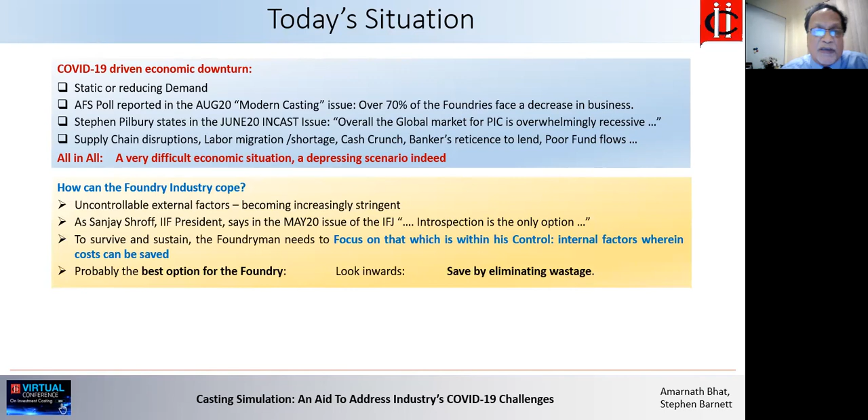The external factors are becoming more and more stringent. So we need to look at what is within our control, look within, and that probably is the best option for the foundry, save by eliminating wastage.

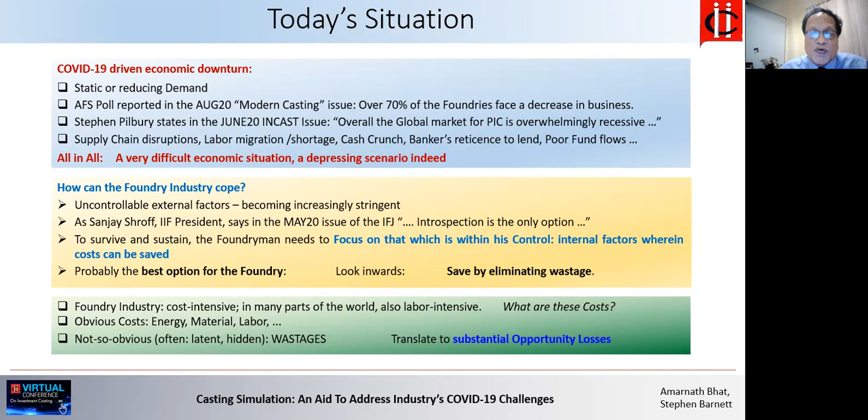The foundry industry worldwide is cost intensive. Out here, it's also labor intensive. What are these costs? Some of the obvious costs are energy, material, labor, and so forth. But some of the not so obvious, often quite latent or hidden costs are wastages. And these lead to substantial opportunity losses.

What can the foundry do? What are these factors that are within the foundryman's control? First, minimization of specific consumption of energy, material, and so forth.

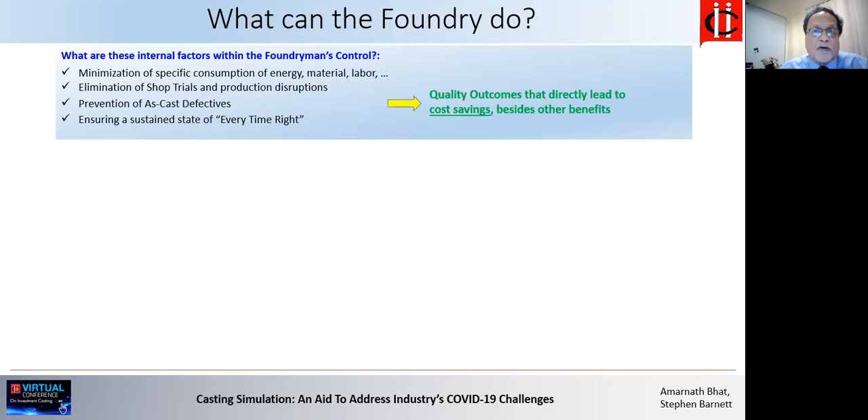Eliminate, maybe to start with reduce, but eliminate shop trials and disruptions. Prevent as-cast defectives and ensure a sustained state of not only first time right, but every time right. All this will lead to quality outcomes that directly lead to benefits such as cost savings.

Now, the key thing in all this is prevention of wastage. Whether we do more trials, whether we have as-cast defectives, or our yield is poor, it all boils down to wastage. So if we prevent wastage, it translates to opportunity gains. As Philip Crosby wrote in his book Quality is Free in 1980, quality improvement is through defect prevention. And as all of us know, prevention is always better than cure.

Now, where does casting simulation come into all this? If you look at the goals on the shop floor, quality improvement, yield improvement, and more critically, defect prevention and elimination of trials, all these are not very well served by manual means alone. Manual methods do not hold a promise of significant mitigation of the problem over the long term. What is needed is computer-aided solutions.

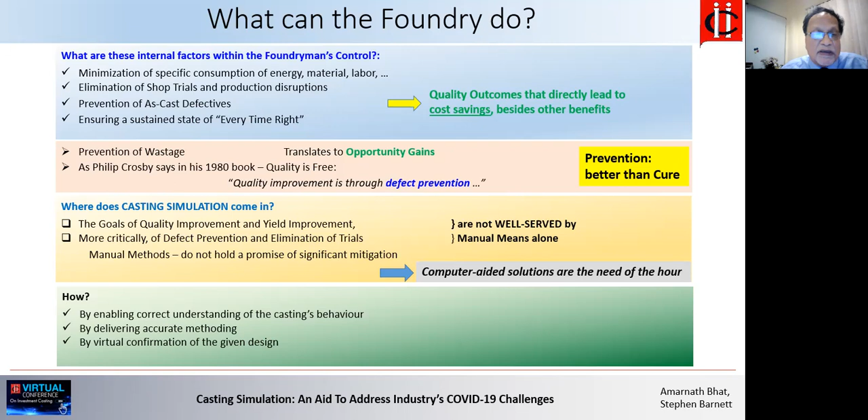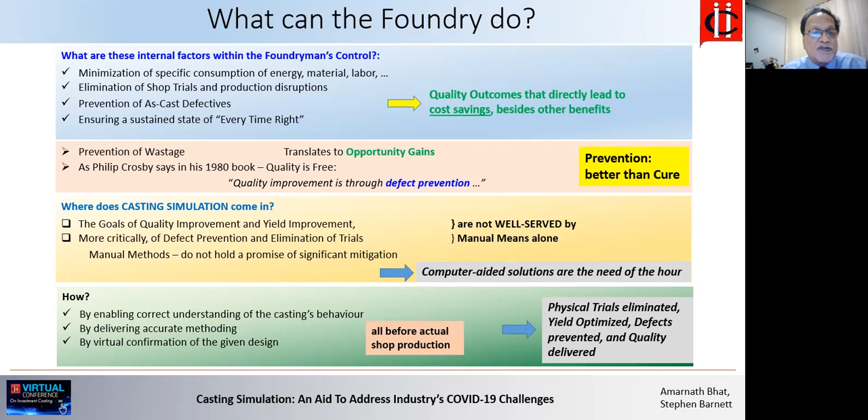Now, how is this possible? By eliminating defects, by enabling correct understanding of the casting's behavior, by delivering accurate methoding, and by virtual confirmation of the given design, all of this before we actually produce on the shop floor. This would result in physical trials being eliminated, yield being optimized, defects being prevented, and quality being delivered.

Of the various functional areas in a foundry, broadly we can classify into three: design, production, and finishing operations. The most critical, the most vital one is methoding. This is directly linked to product quality, yield, and shop trials. Most importantly, it is the single biggest factor that is almost completely within the foundryman's control.

Now, for a method to be effective, what we mean by this is it should consistently deliver defect-free castings. That means it should be robust enough and accurate enough to consistently deliver defect-free castings. It should be accurate in all design aspects, with regard to all the principles and so forth, but it should factor in the foundry's constraints and capabilities.

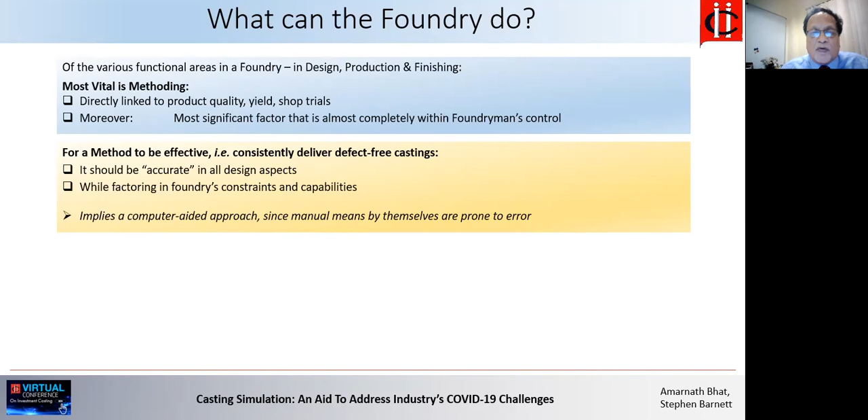Now, all this means that you need a computer-aided approach because manual means by themselves are prone to error. So we therefore focus on design and improvement of methods using computer-aided tools such as simulation systems. What can they do? They can prevent defects, assure quality, improve yield, eliminate shop trials, which are a complete waste, and make the method robust.

Now, all these outcomes contribute to reduction in overall operating costs, and this is a very important goal to achieve in the current difficult times that we are going through.

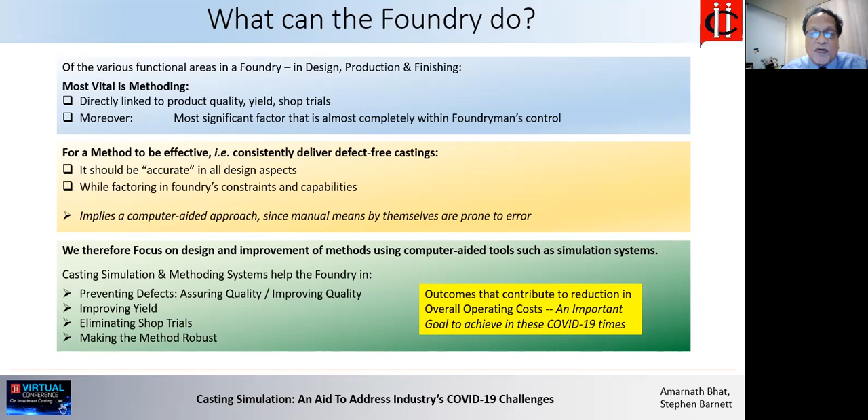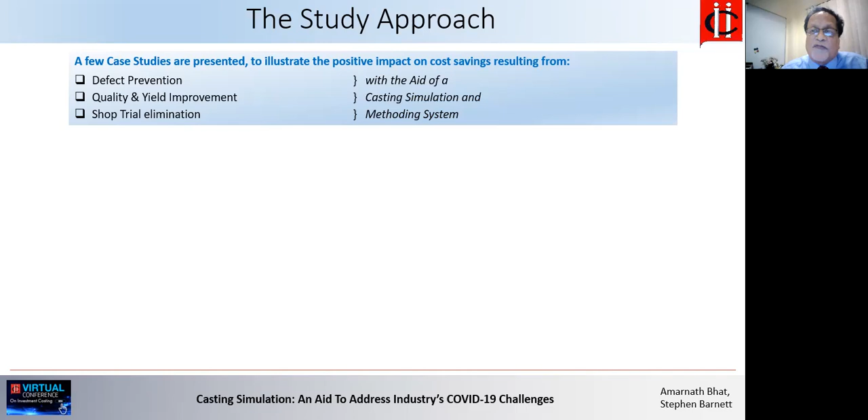Now, what is the approach that we have used in this study? A few case studies have been taken up and we are presenting them to illustrate the positive impact on cost savings resulting from defect prevention, quality and yield improvement, and elimination of shop trials, all with the help of a casting simulation and methoding system.

The investment casting projects studied were 3 each at 3 foundries in India, all in Rajkot, and 1 project at a Hungarian foundry.

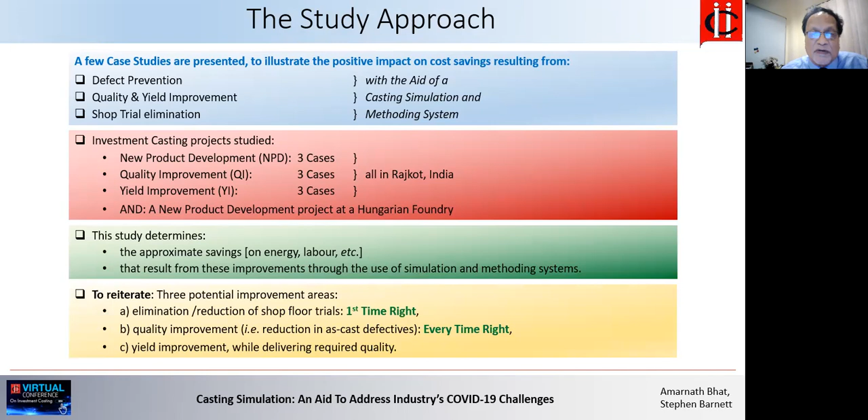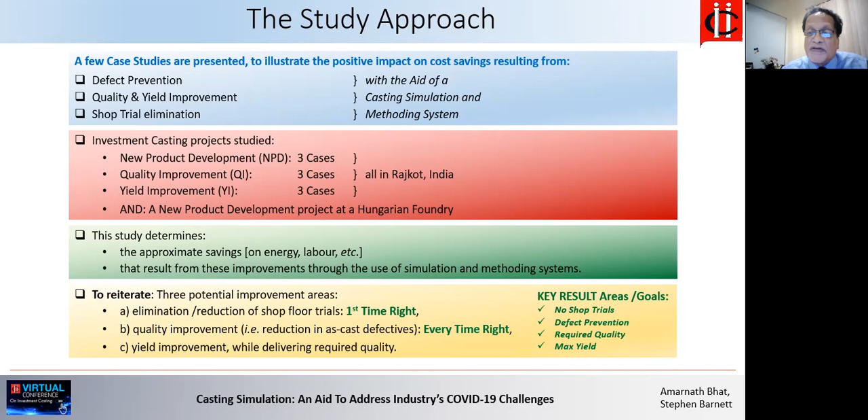This study determines approximate savings, since we have to depend on the foundry's inputs which are to some extent approximate. These are the savings achieved on various factors resulting from improvements using simulation systems. Three important improvement areas were identified: elimination or reduction of shop trials, quality improvement, and yield improvement, all while delivering the required quality. Those are our key result areas and goals.

The investment casting units used in this study include 4 units. Unit A is the Hungarian foundry Magyarmet. Units B, C, and D are 3 investment casting units in Rajkot, India. The Hungarian foundry's casting used a Hastelloy for this end section, while the foundries in Rajkot mostly used WCB castings, barring a few stainless steel castings. The Hungarian casting was by far the largest and most spread out, whereas the others are small to medium-sized castings.

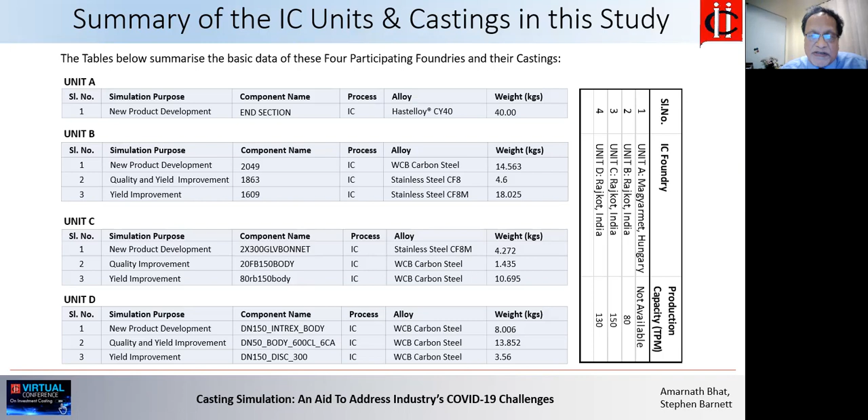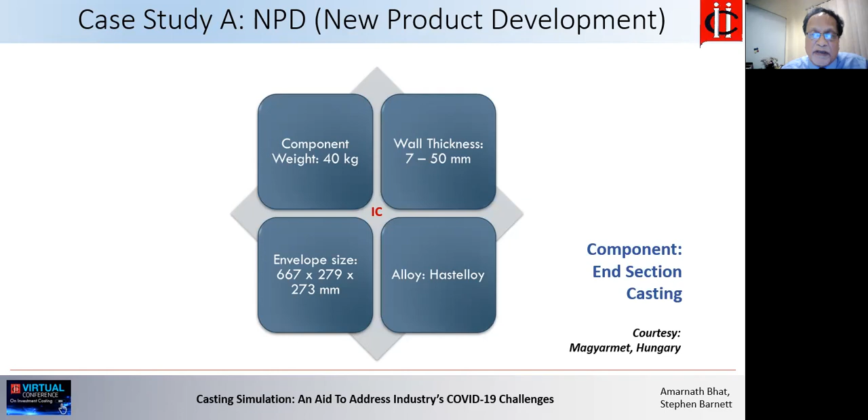Let's look at each case study in detail. The first is this Hastelloy component from Magyarmet, called end section casting, a 40 kg Hastelloy casting. You can see the pictures of that component. In stage 1, the foundry's customer didn't have a CAD model or drawings, but gave a sample component. A solid model was generated through physical measurements, and a step file was created once the model was obtained. This was used for casting simulation to determine castability, identify major hotspots, and understand freezing patterns where defects might occur.

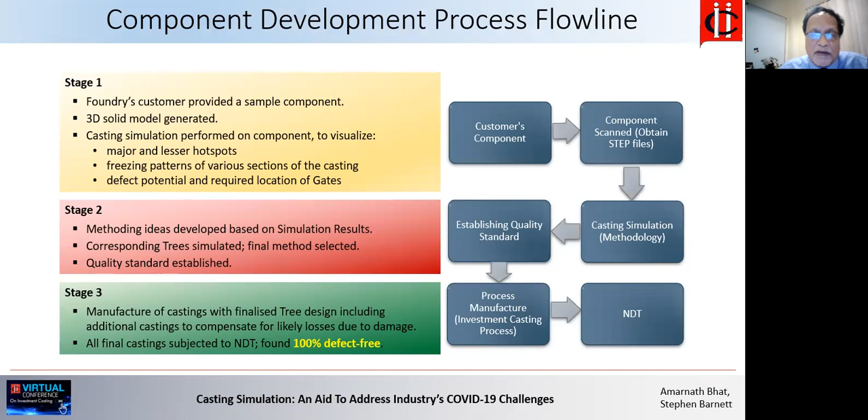Once this was understood, a few methoding ideas were developed and the trees were designed, then simulated to establish a quality standard. Finally, once the final method or tree was selected based on the study of all the designs, it was implemented on the shop floor and found to be 100% defect free. That's the casting there, and some of the simulation outputs like temperature maps and hotspots are shown in this presentation.

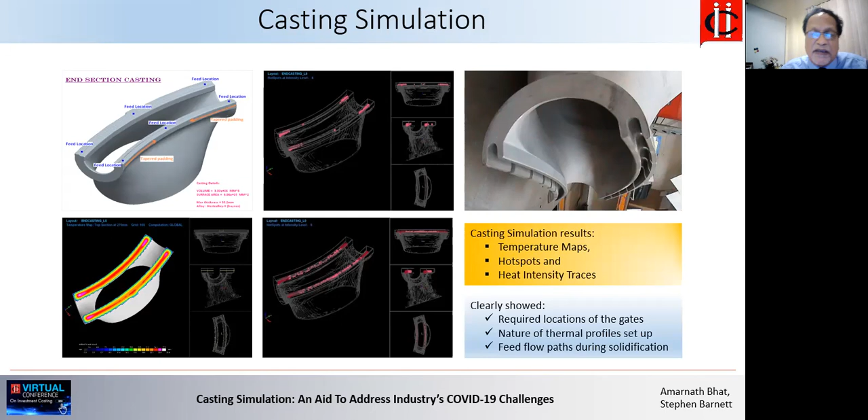The simulation results essentially focused on temperature maps, showing the profile and distribution of temperature across various sections, hotspots at different intensity levels, and what we call heat intensity traces. These results showed the required locations of the gates, where one needs to apply them, and what kind of freezing patterns and feed flow paths are set up.

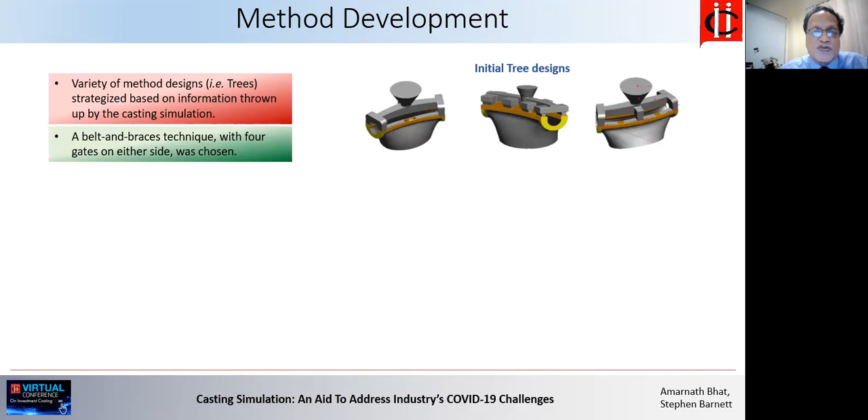From the initial information, a number of different designs were generated, ranging from very high yield designs to lesser yield designs that were more robust and safer. After studying these simulated designs, a design with 4 gates on either side was chosen. This was simulated, but problems were found at 2 ends, so further gates were added. That became the final design implemented on the shop floor.

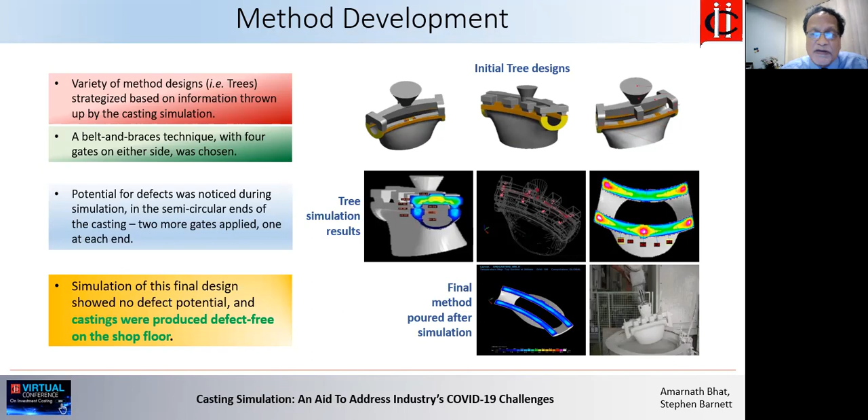As you can see, the component out there near the slurry tank - this final design was implemented on the shop floor.

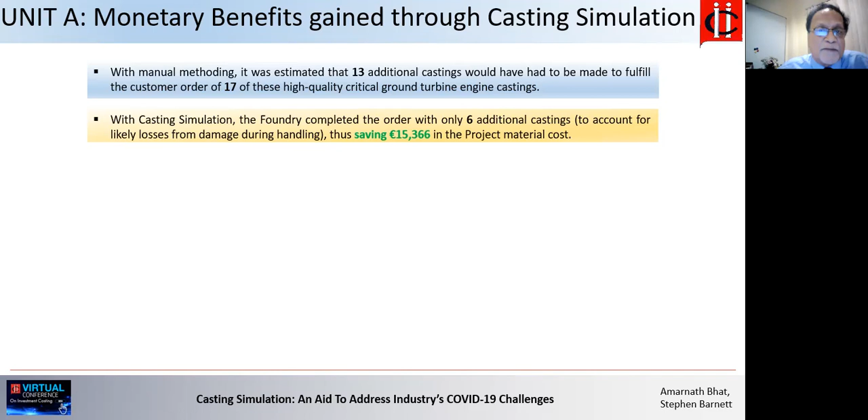Now let's look at some of the monetary benefits gained by this foundry through the casting simulation process. Prior to this, the foundry used manual methoding, and for every job they would estimate additional components to be cast to account for defectives and damages, like a buffer. In this instance, they estimated 13 additional castings would be required. The order quantity was 17, so they planned to make 30 castings to cover possible defects. But with casting simulation, they decided to produce only 6 extra castings, saving 7 castings. These 6 additional castings were produced mainly to account for possible losses from damage during handling. This translated to a saving of over 15,000 euros.

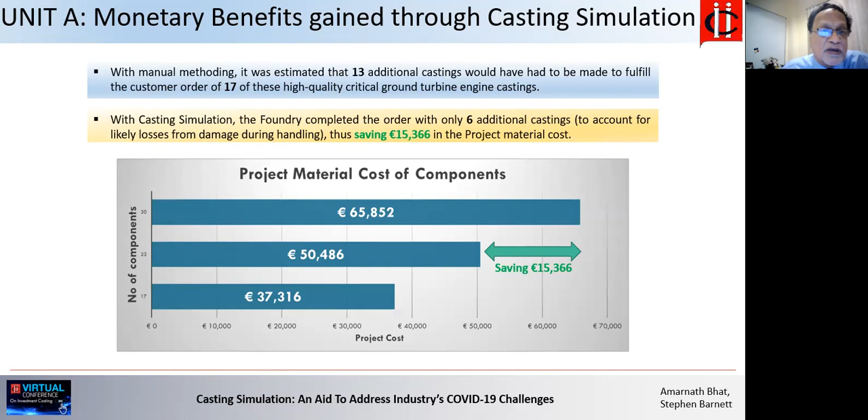With that kind of saving from just one component, they decided to go in for a simulation system - they said this is worth it. That was one project at Magyarmet. We have a few projects at each of the 3 Rajkot foundries: one in new product development just like the Magyarmet case, one in quality improvement, and one in yield improvement.

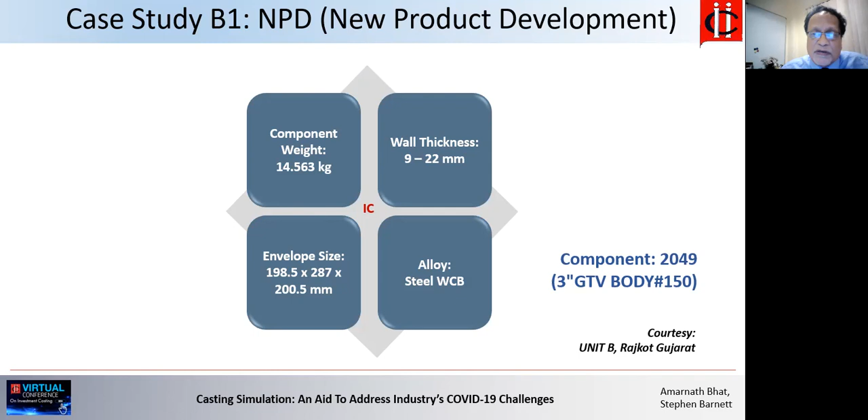This is the first project, the first casting at one of the foundries, which we'll call Unit B. This is a new product development job - it's a valve body, about 15 kilos, a steel WCB casting.

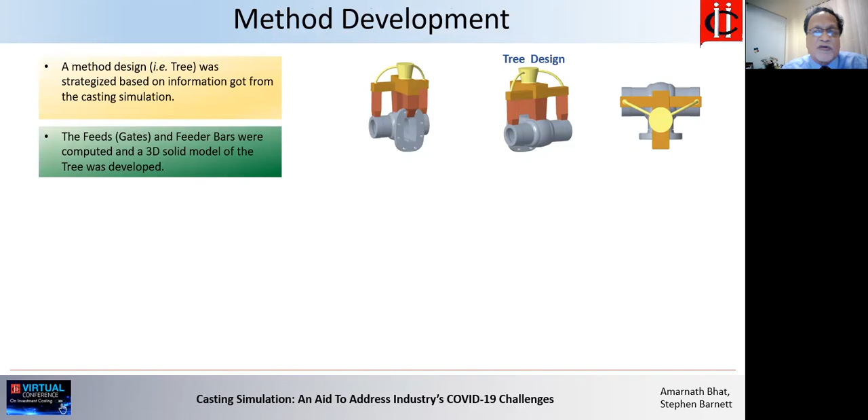Based on that, a method design was developed after looking at the casting simulation results, and the gates and feeder bars were computed, and a 3D model generated. This was simulated, and it showed there would be no defects. This was then poured and actually checked on the shop floor. RT level 1 was achieved, as against a requirement of level 2, with a reasonably good yield.

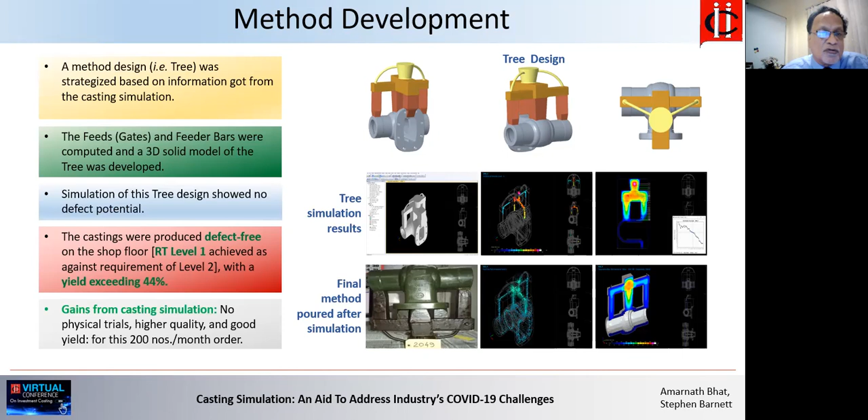So the gains from this particular casting simulation job: there were no physical trials. They simulated on the system, saw the results, developed the design, simulated the tree, and cross-checked that it would be okay. They poured it and found it was okay. So good quality, good yield, and no physical trials.

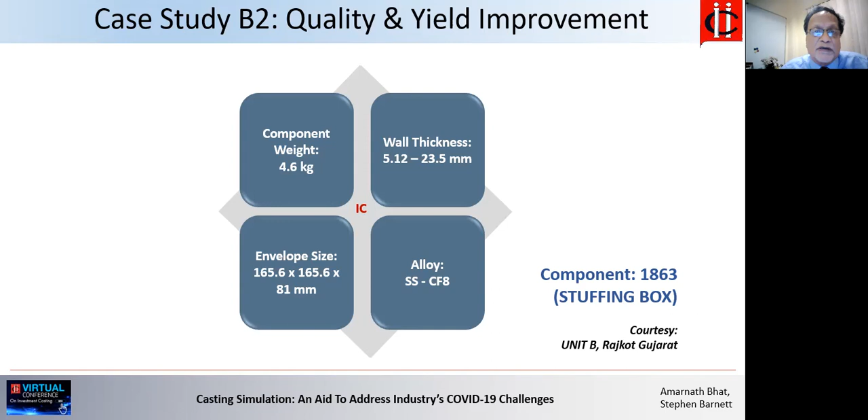The same foundry, another job was taken up where essentially it was a quality improvement job, but as it so happens, they also got a little bit of yield improvement in this case. This was a stainless steel component, and as you can see, they call it the stuffing box.

Again, a similar process where first the simulation of the casting is done, trying to understand the castability and the casting behavior, and determine where one should apply the gates and so forth. Later on, calculate the gates and feeder bars and develop the tree.

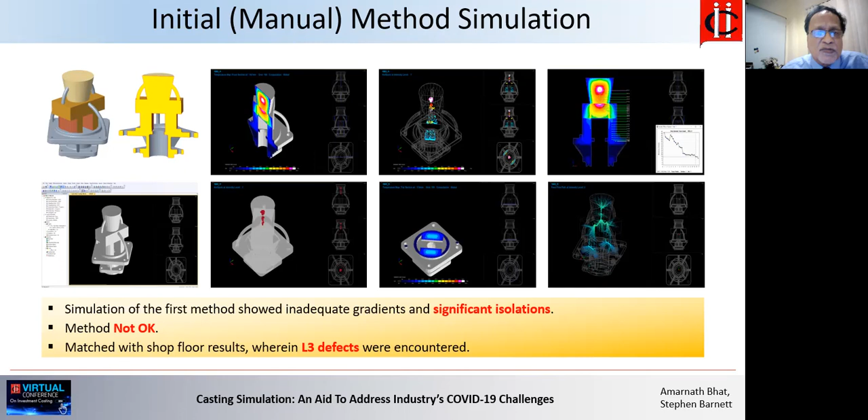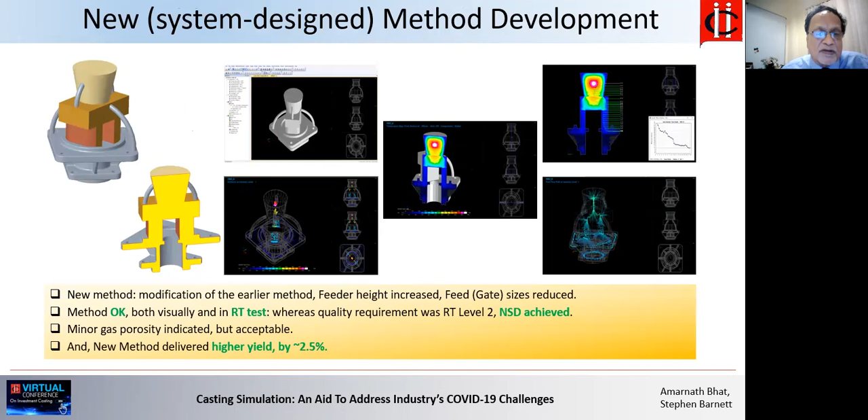Then a new system was designed, and this system was implemented after checking on the simulation system. It was found to be okay, and this was implemented. They found that this method is okay. There was a minor gas porosity, but it was acceptable, and the rest of it was NSD, and they got a slightly higher yield also in the bargain.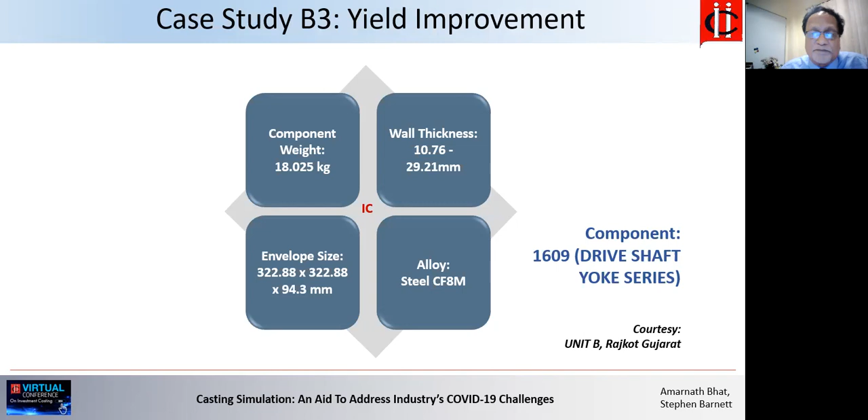The same foundry did a third job, essentially aimed at yield improvement. This again was a stainless steel component called a drive shaft, and that's what it looks like.

Again, a similar process was used. The casting was first simulated to understand its castability and determine the location of the gates. In this case, the foundry came up with three possible designs.

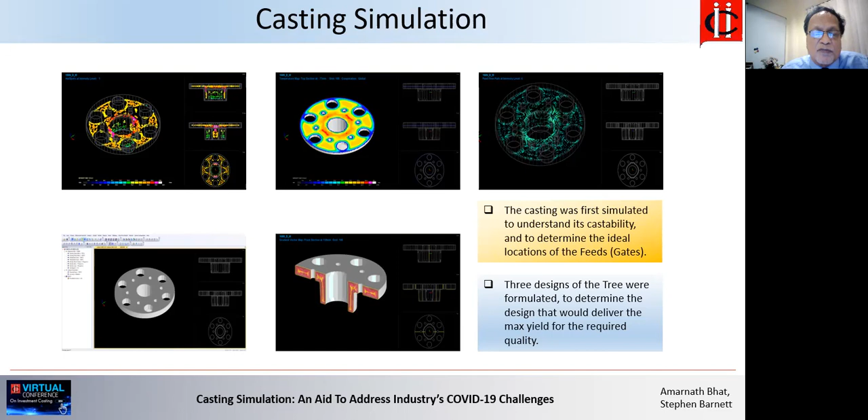They decided to model all of them and simulate all of them, to try to figure out which one would give good quality and was likely to give the best yield. So the idea was to try different things on the computer and select the one with the best yield.

This was the first method that was tried, and this was also poured and checked on the shop floor. It was found to be okay. RT level 2 was achieved, at about 40% yield.

Another quite similar method was developed, a tree with slightly different gates and orientation of the gating also. This was simulated, found okay, and also checked on the shop floor, but the yields were very similar and not much different from the first one.

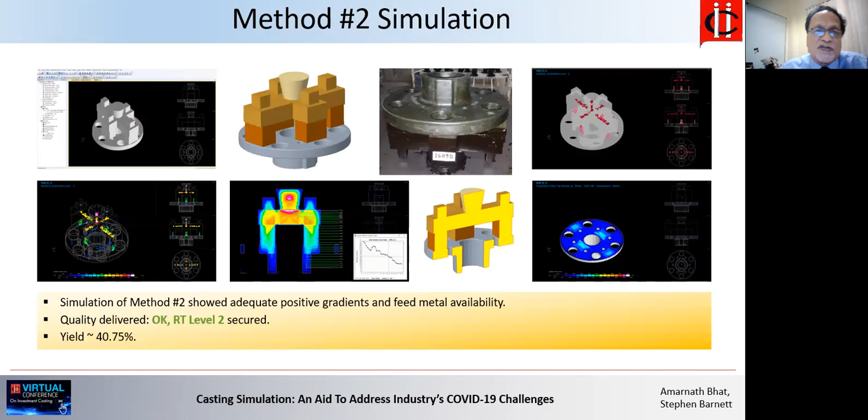Then they came up with the third one, and this was also checked on the system, found to be okay, poured on the shop floor, and here they got a little bit higher yield, so they decided to go with this particular method.

So this is a case where they tried different ideas after simulating the casting, checked all three to see that they are all okay, and then selected the best.

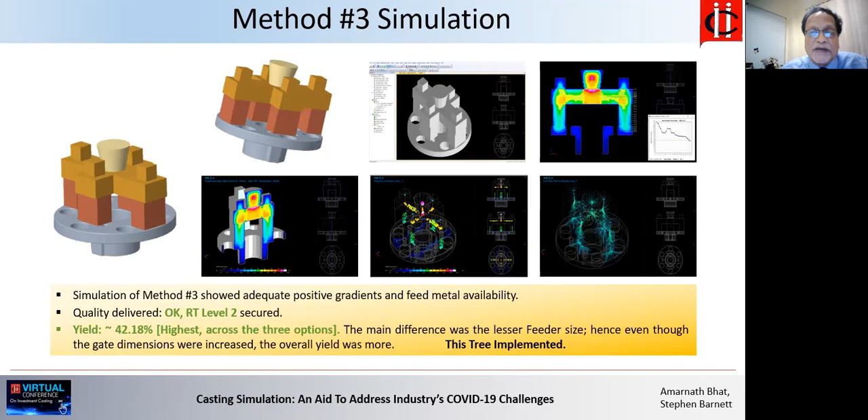Now, if you look at a summary of this particular unit, the castings that were done: one was NPD, new product development, the other was quality improvement, and the third was yield improvement. You can see that there were considerable savings. We are looking at the savings of each, just one of those components in each case.

The significant financial gains secured are as follows. In the first case, no shop trials were needed, so they got a savings of about $126. This was for an order quantity of 200 numbers a month. So this saving is essentially due to the fact that they didn't have to do a shop trial on the shop floor.

The other case involved quality improvement, from a 100% reject rate to a 100% okay NSD level. This again was a regular repeat order, roughly 250 numbers a month, which resulted in savings of about $1,800 per year.

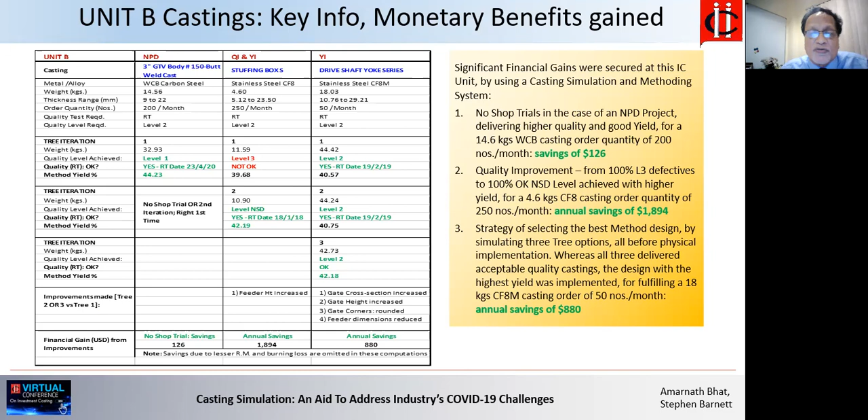The last case was where they selected the best method from a yield perspective across the three designs they came up with. The savings in this case, since they implemented the best one compared to the others, was about $880 per year. So overall, just looking at these particular items, you can see there are considerable savings. If you extrapolate over the other castings they produce, the savings are considerable.

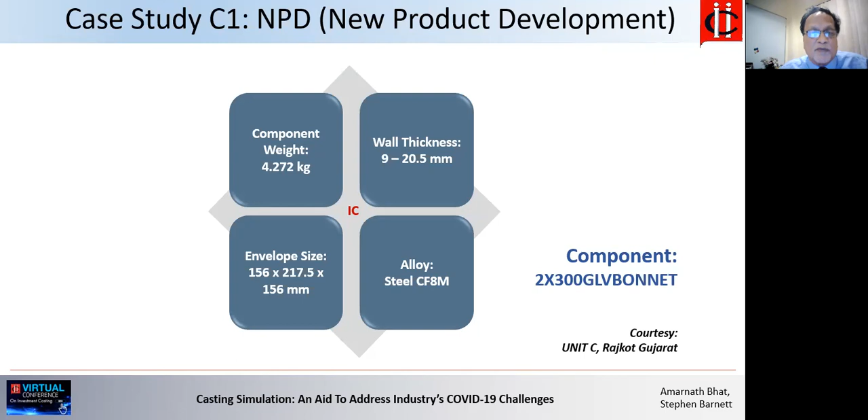The next unit, we will call it Unit C. Again, a similar approach: one new product development job, one quality improvement, and one yield improvement. This particular one is a CF8M bonnet component, and as you can see, that's how it looks.

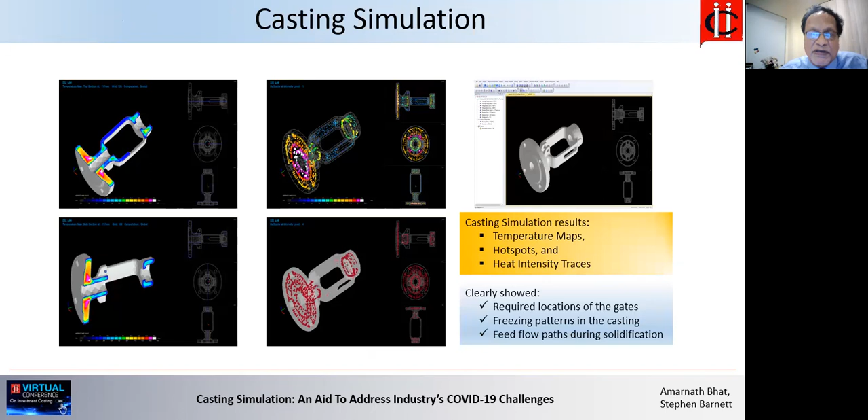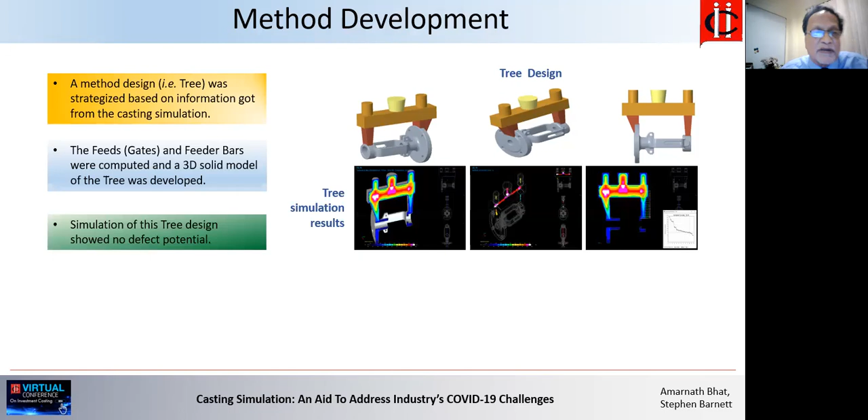Again, a very similar procedure is adopted: first simulate the casting. This helps us understand its castability and defect potential, and therefore how to go about the design, the tree design. Here again, a method was developed based on the simulation results - gates, feeder bars, etc. were computed and a 3D model developed. This was simulated and checked on the system for problems, and they found no real defect potential. This was implemented on the shop floor, and they achieved RT level 1 with a yield of roughly about 34% defect free.

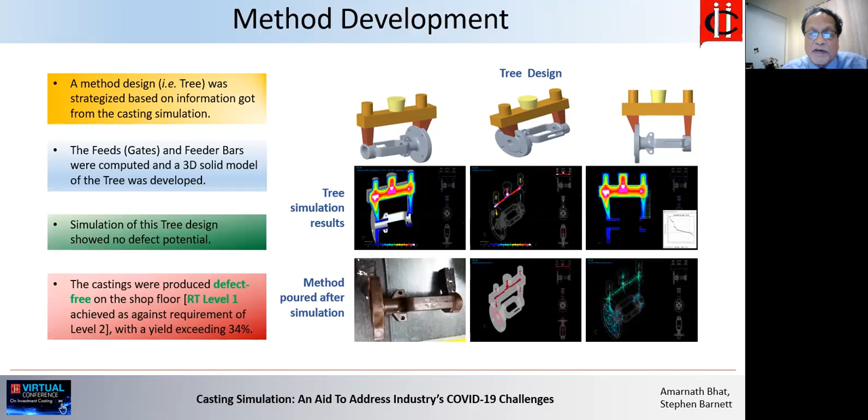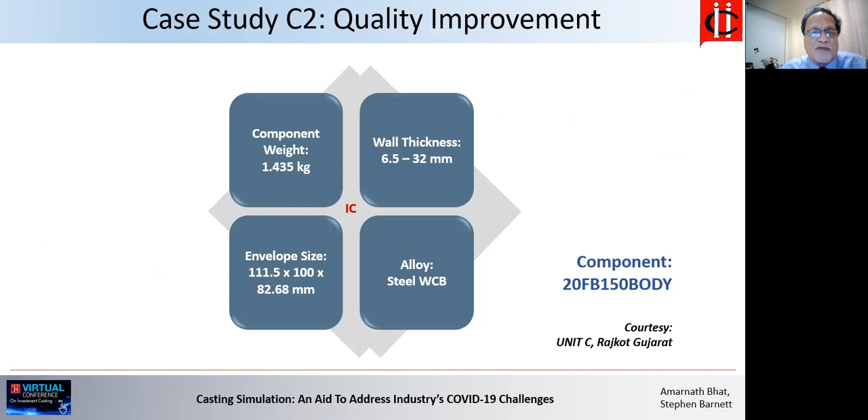The other job they took up was a quality improvement job. This is a very small component, about just 1.5 kilos, WCB material. You can see the component - a small body component. Again, same process: first casting simulation, and then we go on to the method that was done.

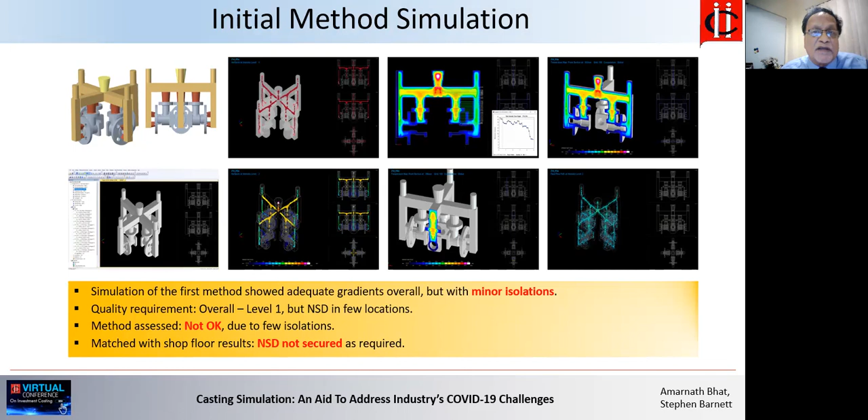This was the initial method that was developed and simulated, and it was found to have some problems. This was implemented on the shop floor, and it showed that it was overall okay, but there were minor isolations in the simulation system. On the shop floor, overall they achieved the required quality, but at certain locations NSD was required and that was not achieved, so this had to be rejected. They then came up with a new design, quite similar to the previous one, but rectified the particular locations where they had issues. This was poured and they found the quality was okay.

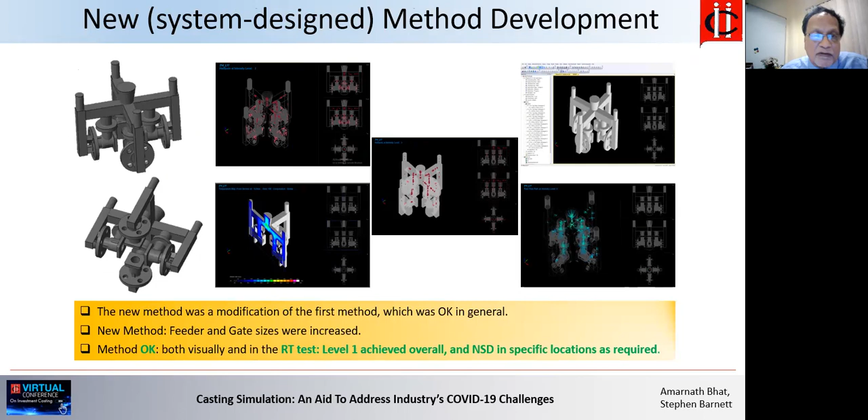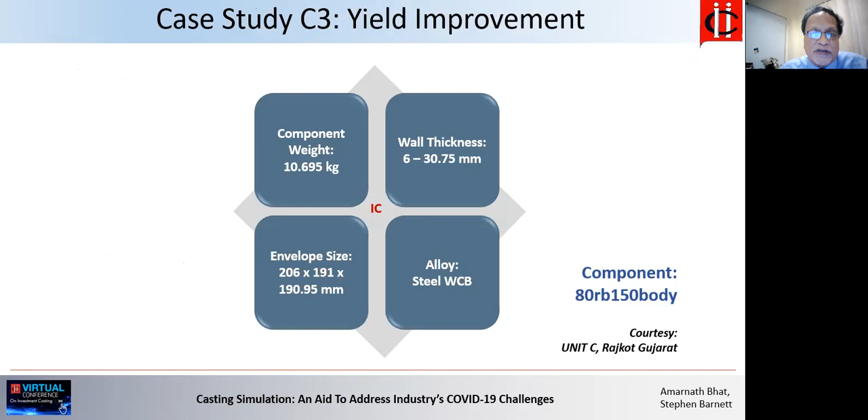The third case in this particular foundry was a yield improvement job. It's roughly a 10 kilo component, WCB, again a body type of component. Similar process where different outputs are generated from the casting simulation process, and based on that we understand the behavior, castability, and most critically, the location of the gates.

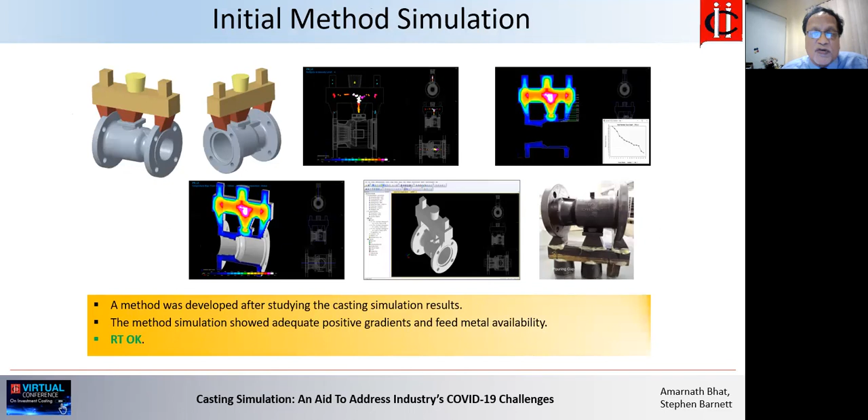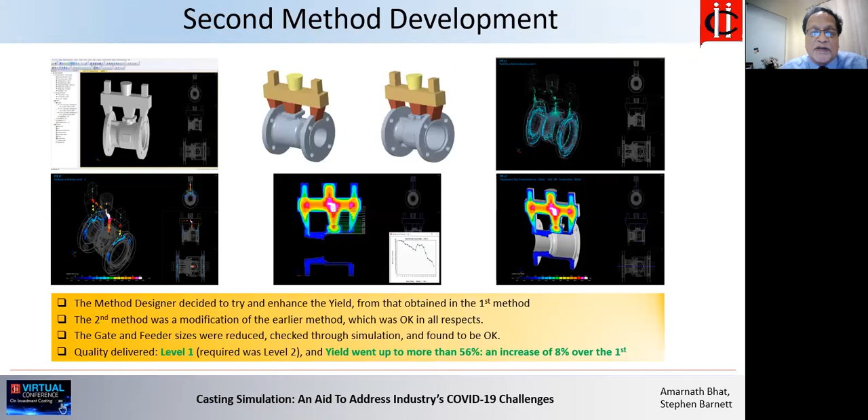Based on this, an initial method simulation was done and found to be okay, as you can see there. Then they developed another method, which was also simulated and found to be okay. But in this case, they found a higher yield, an increase of almost 8% over the previous one. So both methods were developed, checked on the system, and both implemented to confirm they achieved okay quality, the required quality. But since the second case gave a higher yield, that was implemented.

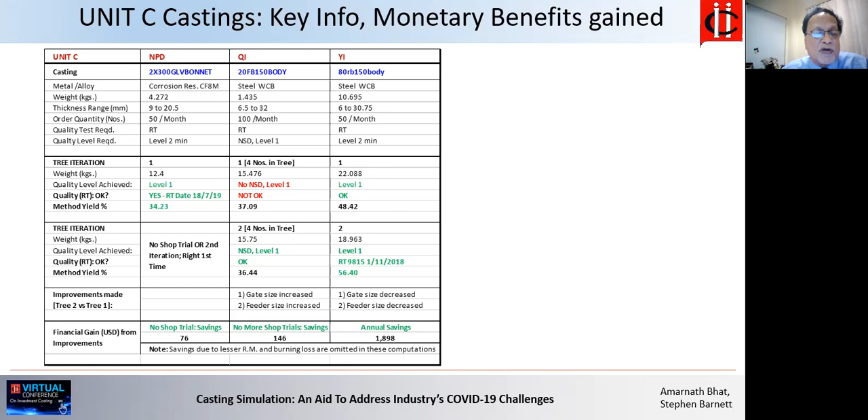Now this is a summary of the three jobs at this particular Unit C. In the first case, new product development, there was no shop trial, so the savings were a small amount of about $70 because they did not do any trial on the shop floor and got it first time right. In the other case, quality improvement, they got an improvement of about $100 because again there were no more shop trials - once the quality was set, they continued production. So reduction or elimination of the trial resulted in a saving of about $100.

In the third case, this was a yield improvement, and they got an annual savings of about $1,800 in this case.

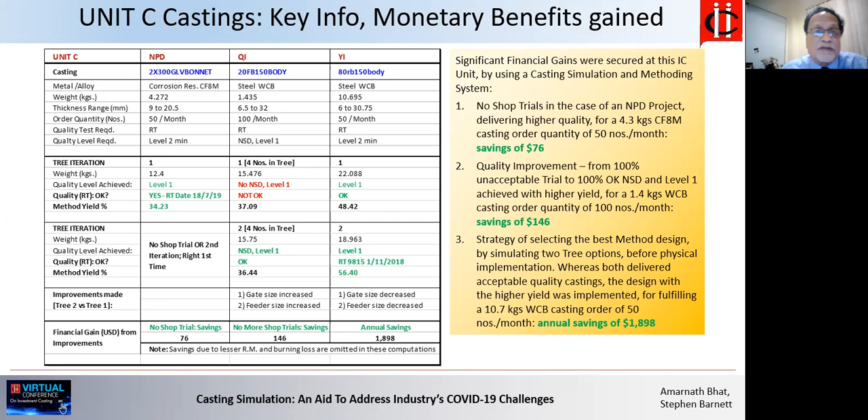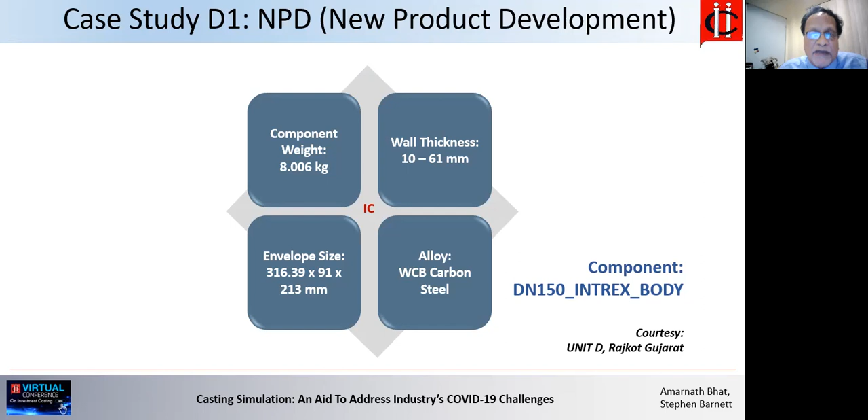This is the last foundry where some of these case studies were done. As before, the first project was a new product development, an 8 kilo carbon steel component, a body again, roughly, that's the kind of body.

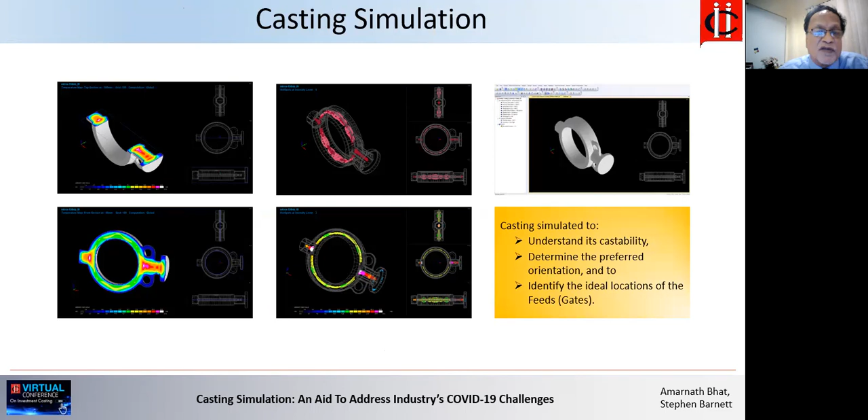This again is a similar process of simulating the casting and understanding its behavior and identifying the location of the gates. The tree was designed, the gates, feeder bars, pour cup, and runner bars were all computed from the system, and they developed the tree.

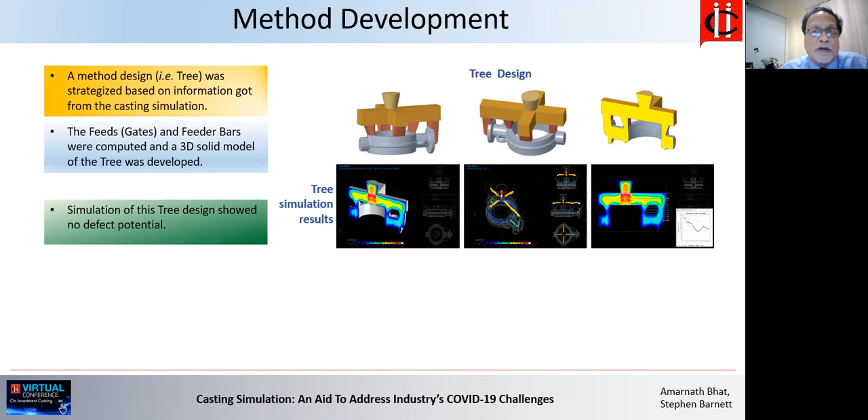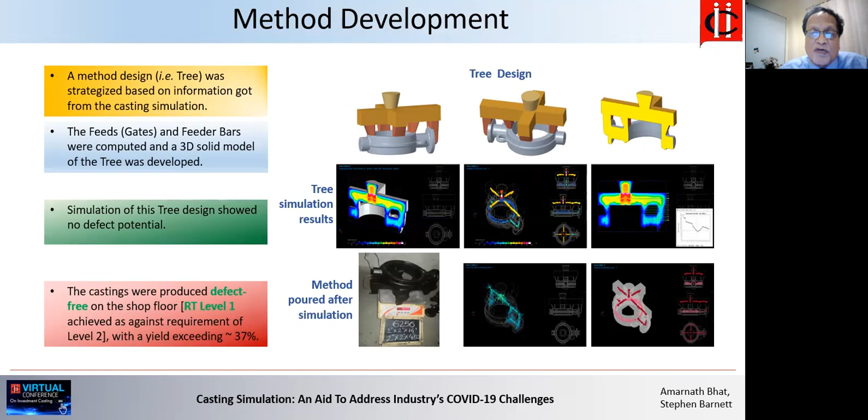This was then simulated to check whether it's going to be okay or not, and then it was poured on the shop floor. Again, a higher quality level was achieved as against the requirement, with a yield of about 37%.

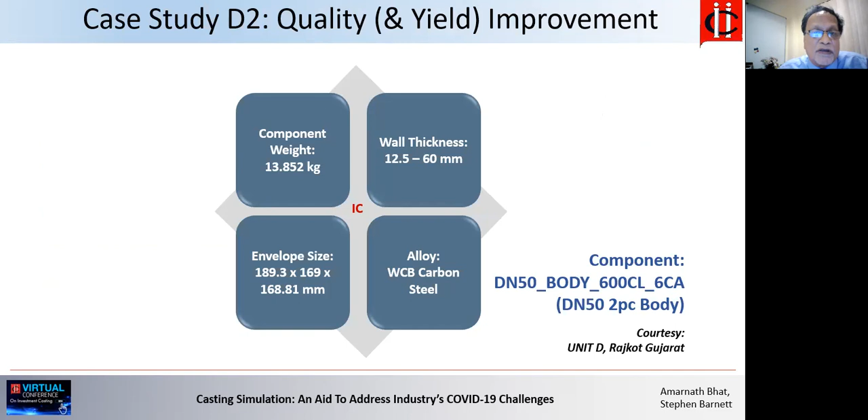In the second study done at this foundry, this is a quality improvement project, roughly about 14 kilo casting, carbon steel casting, again a body, as you can see.

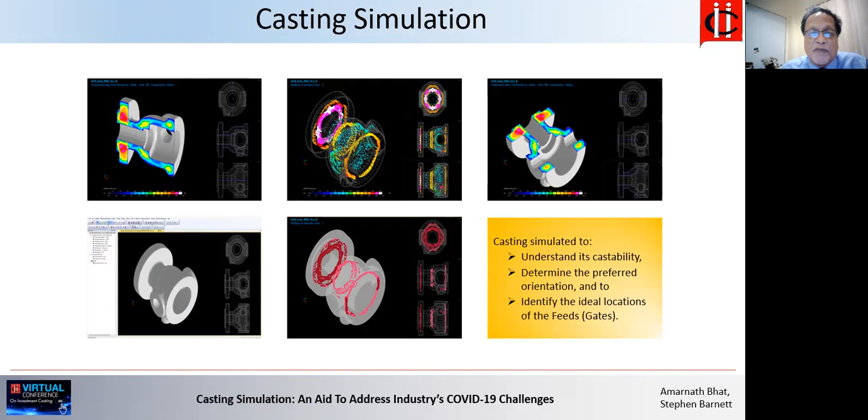This was simulated, the same process is used. First simulate the casting, understand its behavior, and based on the results, design the tree. Most significantly, the location of the gates, and then the computation of the feeder bars and runner bars and so forth. In this particular case, there was a method which already existed prior, and this was simulated.

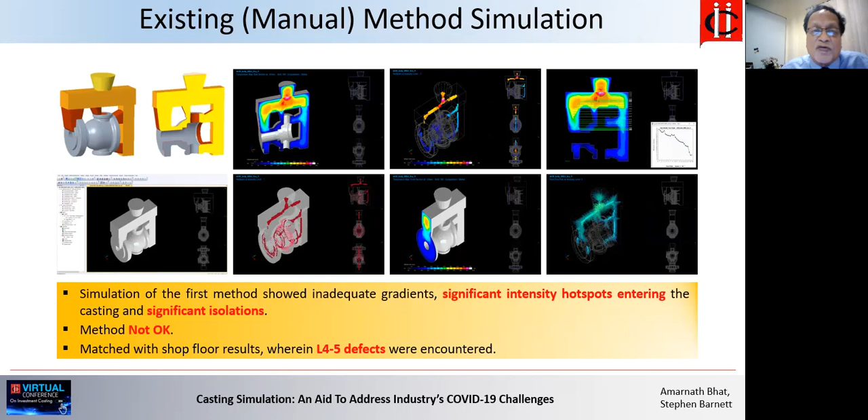They found a lot of problems, and the system also showed significant intensity hotspots in the casting when the tree was simulated, significant isolations. And on the shop floor, they found L4, L5 level defects.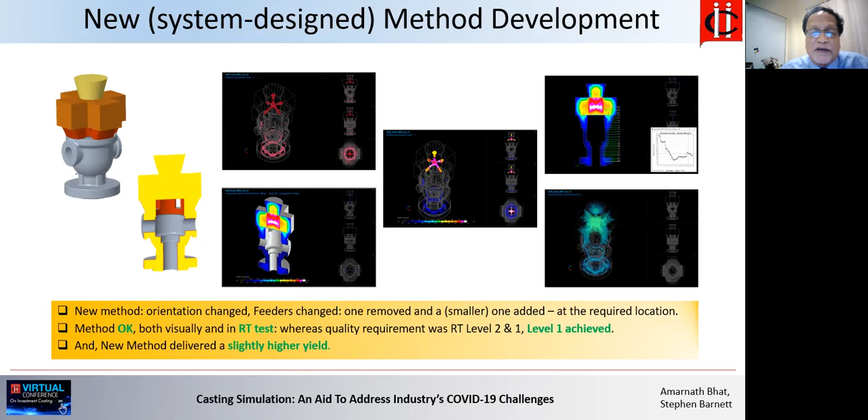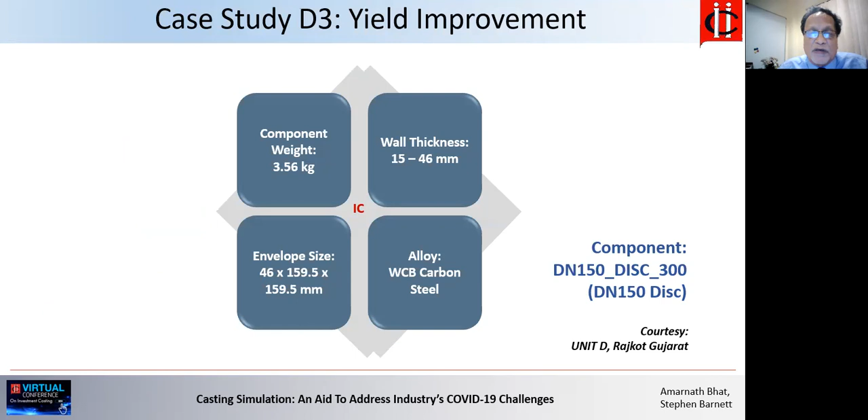The last case in this particular foundry was a yield improvement project. Again, a very small one, 3.5 kilos carbon steel component, a disc type of job.

A very similar process. Some of the outputs from the system are seen here, different outputs. Casting was simulated to understand castability, etc.

In this case, they came up with two designs. The previous foundry came up with three designs. Here, they came up with two designs of tree, and they simulated both to check whether both are okay, and then chose the higher yield tree.

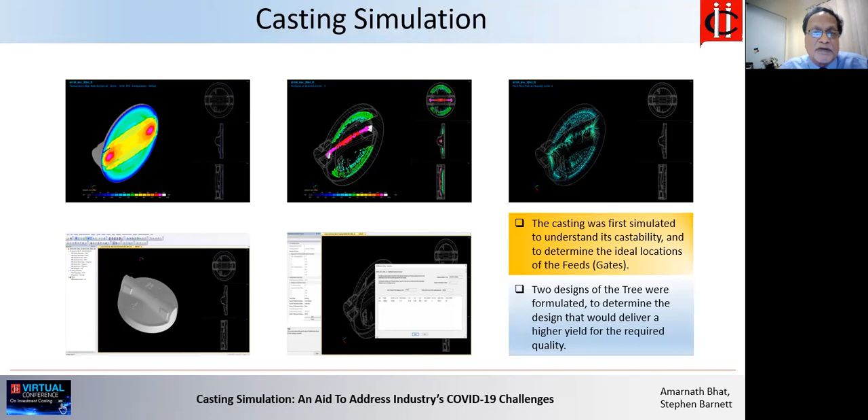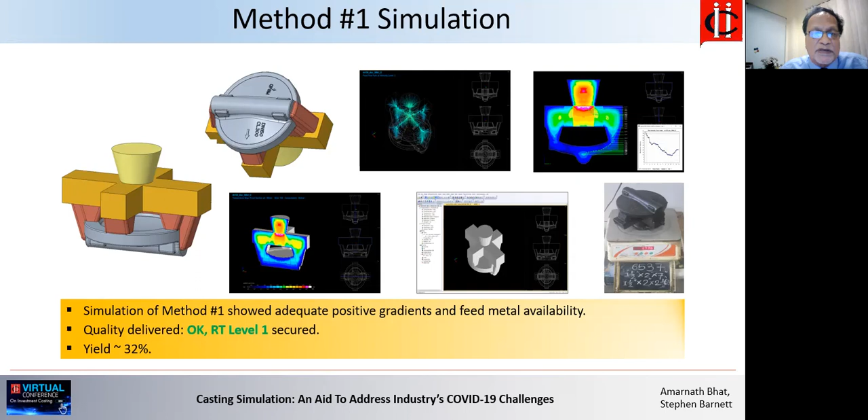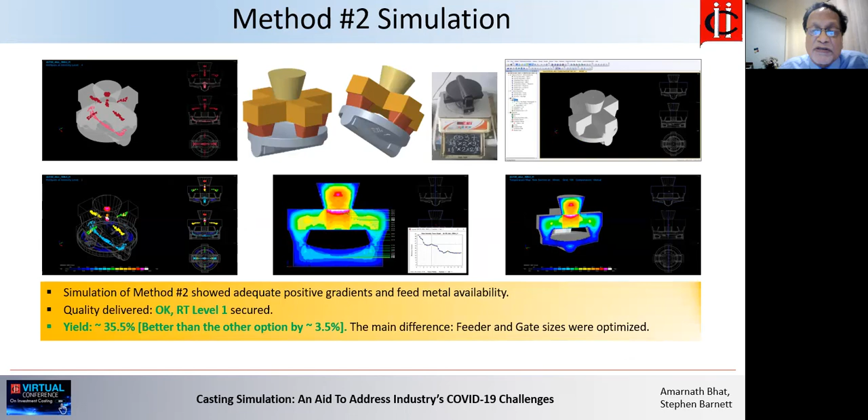This is the first one, which gave okay results, RT level 1 secured, and a certain level of yield. They then came up with another design, again checked on the system, found to be okay, and this had a slightly better yield. This was poured on the shop floor and then implemented.

Now, this is a summary of the financials, the gains that they got from these three projects. The first one, a saving of about 90 odd dollars, is essentially because there was no need to do a shop floor trial. Directly from the system they saw it was okay, implemented it, and checked okay.

The second one, a quality shrinkage, a quality improvement job. There was gross shrinkage, as you can see, level 4, level 5 defects. Subsequently, an improved job done on the system, and they got an okay casting with a slightly higher yield. The annual savings because of this was about $500.

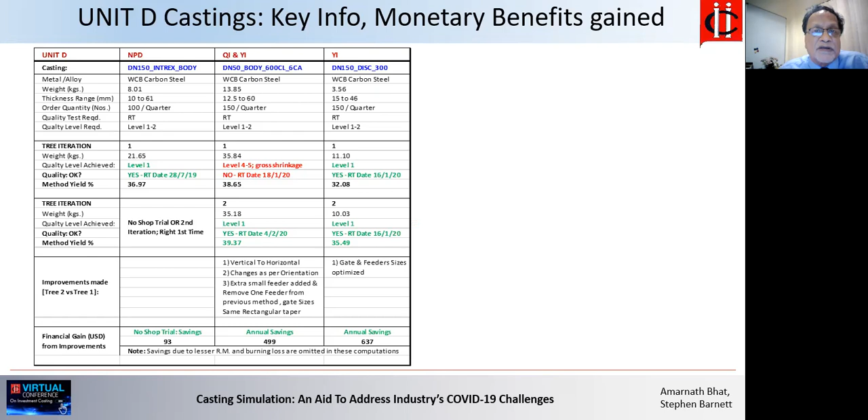In the third case, a yield improvement project, between the two designs they had a slightly higher yield in the second case, and that gave a reasonably good savings over the year, annual savings over the year.

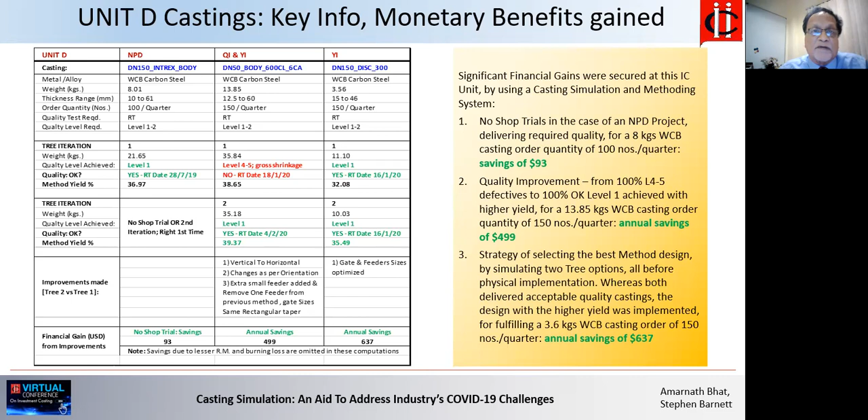Now apart from these specific cases, three cases at each of these foundries, and the very first one at Magyarmet in Hungary, apart from these which are specific to those castings, we interviewed and got a kind of general overall assessment from the owners or managing directors of these three foundries.

We did not do this at the Hungarian foundry, but this was done at the Rajkot foundries, where we asked them to assess their general experience of before and after implementing a simulation system. What was the situation before, and what kind of improvements they saw after.

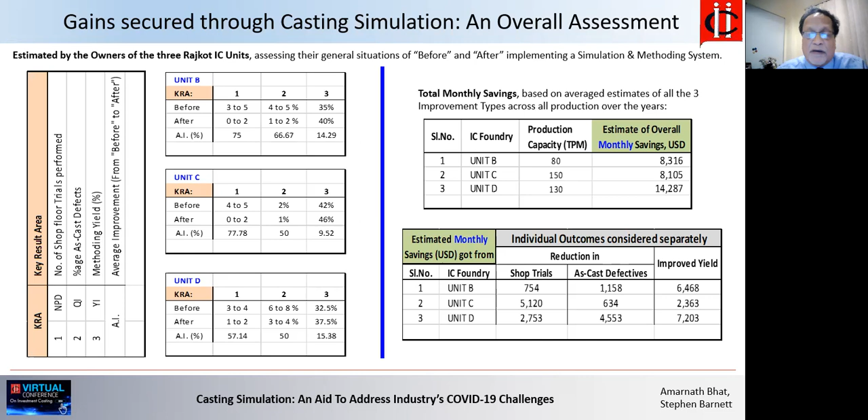So anyway, if one looks at all these overall savings, it shows that there is considerable potential for savings, by eliminating wastages on the shop floor, just by using casting simulation and methoding systems.

So we are more accurate. We need to do less trials. We have less as-cast defectives. We can improve yields, especially important for regular production jobs and not for one-off jobs. So all this together means significant savings.

Based on this, we have concluded that one of the things foundries can do today is to extensively, rigorously, and consistently use casting simulation and methoding systems to implement in all these areas and derive the benefits. So systematic yield improvement, systematic quality improvement, and systematically ensuring that shop trials, which are a complete waste, are eliminated. We conclude that casting simulation systems are very, very useful to foundries today. I mean they were always useful, but today more so because of the extremely depressed economic situation, which means they really need to conserve, tighten the belts, and conserve money.

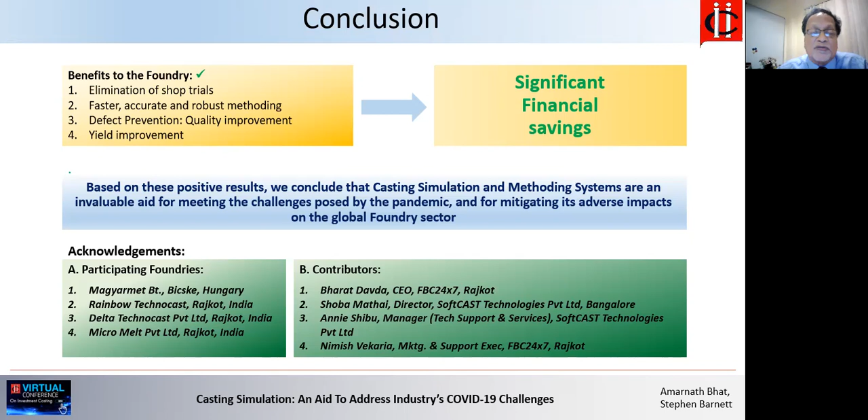Finally, I would like to acknowledge the participating foundries: Magyarmet in Hungary, Rainbow Technocast in Rajkot, Delta Technocast in Rajkot, and Micro Melt also in Rajkot. These are the participating foundries, and thanks to them we are able to get some good actual real-life data. Otherwise it's mostly theoretical. This is where, from the shop floor, we have been able to get some real data and use that data for analysis. Other contributors are my colleagues from Rajkot and Bangalore, who contributed considerably to this paper and presentation.